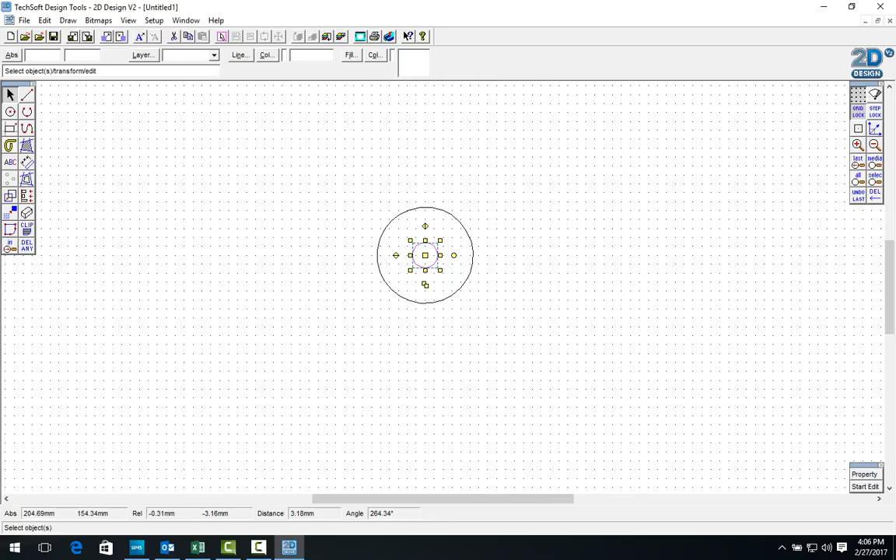We now need to be able to select these and change the dimensions. Click on the arrow, select the first circle, let's select the inner one, and you'll notice this property box appears on the bottom right. Click on property, and we can change the radius to 1 millimeter. That is the size of the motor shaft. It's a 2 millimeter shaft, and therefore it's 1 millimeter in radius.

Click update and OK, and then the outer radius of the outer circle, click on that, click properties. That needs to be 5 millimeters. So we can select that and make that 5 millimeters, update and OK.

We now have the center bit. We might want to zoom in a little bit more so we can see it better. So we'll end up with that shape.

We now need to do the two blades which come out either side of this. So we're going to want two circles. Simply select circles again, go to the center point, and we want to count out 7 blocks because we need 35 millimeters for the length of it. So we count 1, 2, 3, 4, 5, 6, 7.

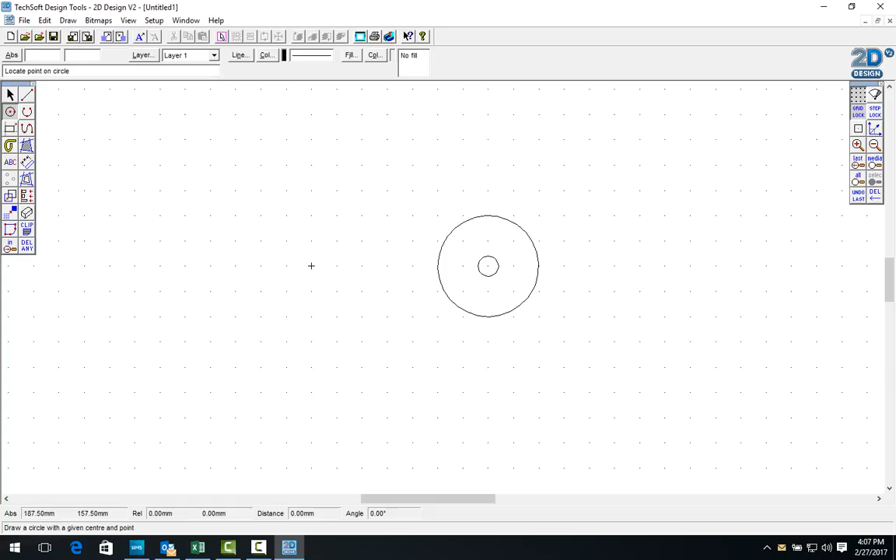We click on there, and then we can draw our circle back to the center. And we want to do another one of those. 1, 2, 3, 4, 5, 6, 7, and draw our second circle back to the center.

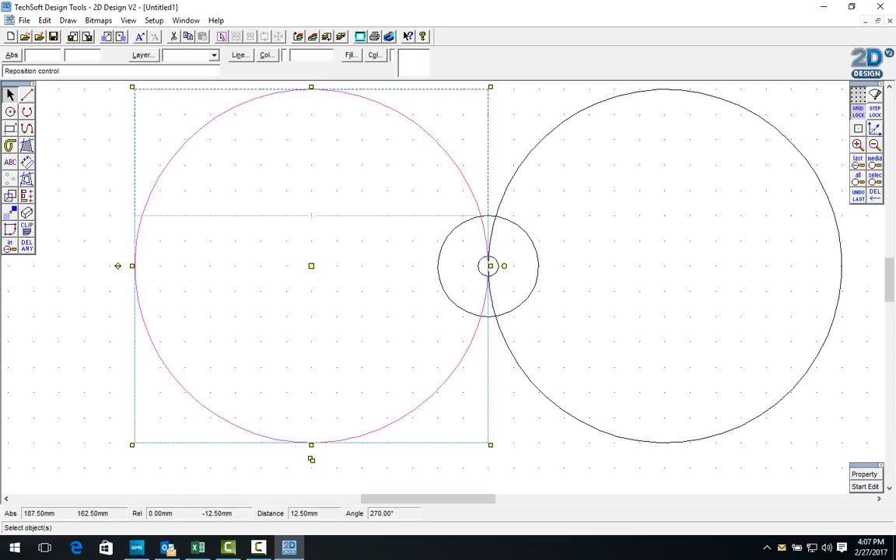We can then click on the arrow again so we can select this. We can select the circle, and now we can adjust the size of the circle by clicking on this and dragging it down. We want to drag it down to approximately the same size as the centerpiece.

We can do the top end and then the bottom end, which gives us that shape, and we can do the same on this side, selecting the top end and bringing it down to there, and the bottom end to there, giving us an approximate fan shape.

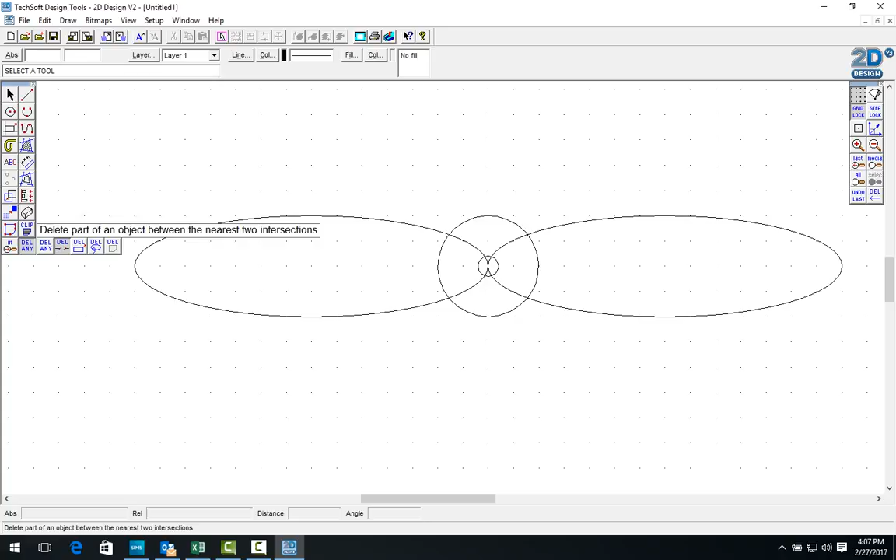We now need to get rid of all these excess bits that we don't want in the center. To do that, we click on delete any here, but when we click on it, we hold the button down and go across to this one over here, which is delete part of an object between the nearest two intersections. Select that, and now using the little hand, we can simply select, and it'll delete between 2 points.

So when I select that, it deletes between that point and that point. I can delete that, that, and that, but I also end up with the 2 leftover lines in the middle of the circle, which I'll need to select to delete them all.

Once that's completed, that is essentially the fan blade designed. This now will need to go to the laser cutter, and remembering the laser cutter, everything in red will be cut out, everything in black will be engraved, and as this is in black, it will be engraved. We want it cut out.

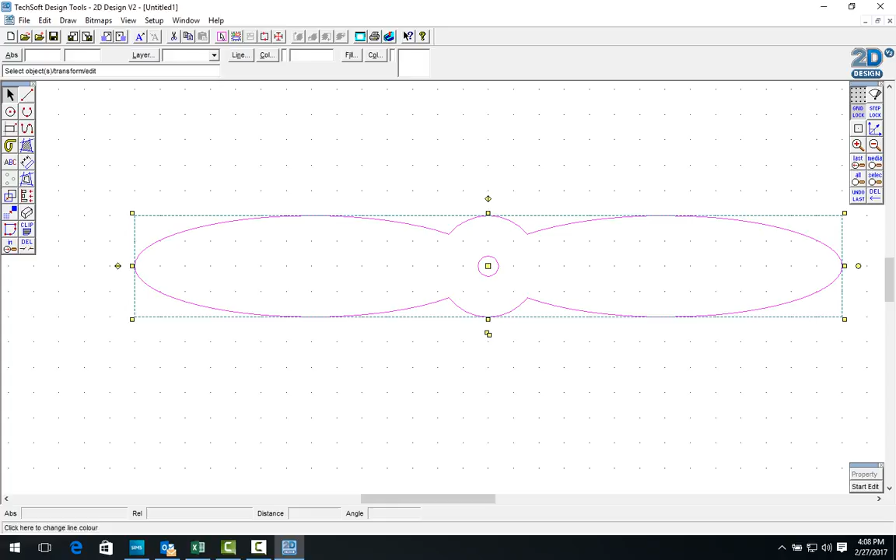So I can select the whole image, choose color at the top here, and then choose the custom red option there and click OK, and we now have the fan blade ready to be sent to the laser cutter. This will need to be saved as a file, and then you can email the file ready to be cut out. Good luck in making your fan blade.